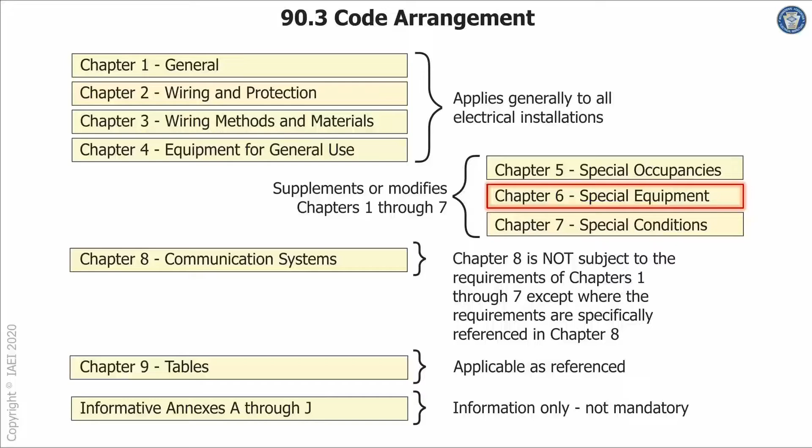So you've got to keep that in mind anytime you're dealing with a subject matter that is not located in those first 4 chapters of the NEC. If we were looking at photovoltaics today, we might see some rules in 690 that would supplement or modify some of those main rules that you would see in the first 4 chapters. And we are in Article 680 today. And Article 680 is one of the most unique articles in the entire National Electrical Code.

There are currently 8 parts to Article 680. For a long time, we only had 7 parts. The 8th part, electrically powered pool lifts, was added a couple of code cycles ago. But we have 8 parts here, and the beginning of each of those parts basically tells us that you have to stay in that part. In other words, if you're dealing with a permanently installed pool in Part 2, 680.20 will tell us that for that permanently installed pool, you have to comply with Parts 1 and 2 of Article 680.

You don't take a rule out of Part 5 or Part 6 and try to apply it to a permanently installed pool. And vice versa, you don't take a requirement out of Part 2 for a permanently installed pool and try to apply it to Part 3 for a storable pool. Again, that makes Article 680 a unique article in that, for lack of a better term, you basically have to have permission to go from one part to the next. You just can't take a rule out of Part 2 and try to apply it to Part 5 without something in Article 680 telling you to do so. So you've got to keep that in mind when you're studying Article 680 as well.

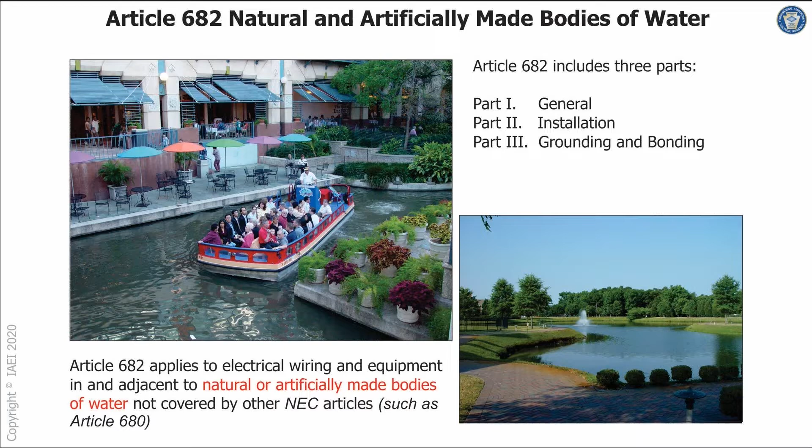Another thing that makes Article 680 unique is the definitions at 680.2. I don't know of another article in the entire code book that has more specific definitions that apply to Article 680. Now, typically, if you find a definition in Article 100, historically that means that definition can be applied all the way across the code. But when you find a definition at .2 of any particular article, in this case 680.2, that definition can only be applied to that particular article.

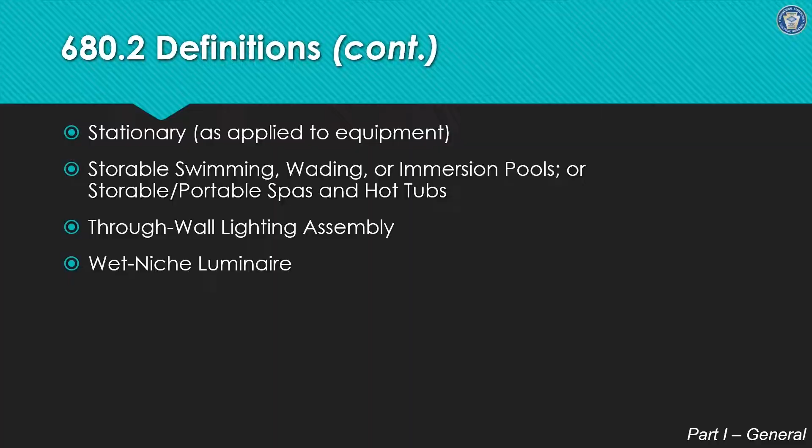And if the body of water that you're dealing with meets this definition right here, capable of holding water to a maximum level of 42 inches, intended to be stored when not in use, constructed on or above the ground with non-metallic molded polymeric walls, inflatable fabric walls, and so on, then you need to stay out of Part 2. You need to apply Part 3 to the particular body of water that you're looking at.

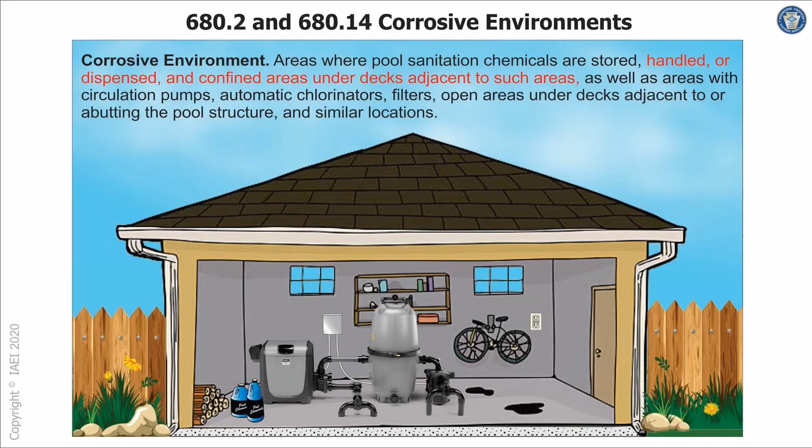We have 3 types of equipment that are defined in Article 680: fixed, portable, and stationary equipment. And a permanently installed pool, that's probably going to fall under the definition of fixed equipment, wouldn't you say? And something like a therapeutic tub would fall under the definition of portable equipment. Stationary equipment, that might be a storable pool, would fall under that type of definition.

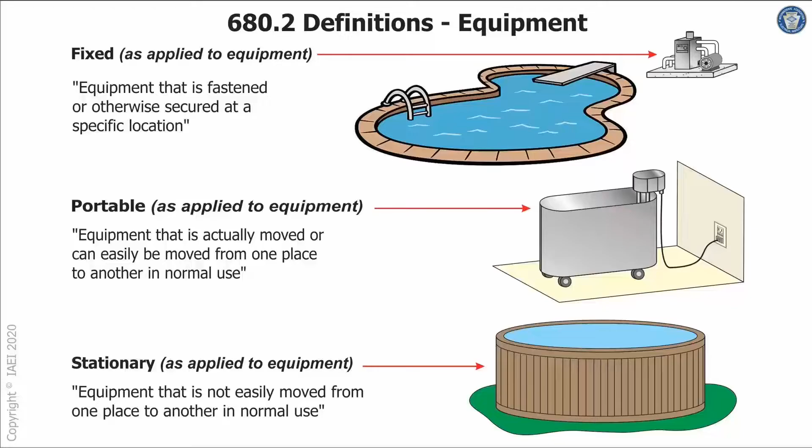New for the 2020 code here, we have a new definition. We had some language in the code dealing with an immersion pool prior to the 2020 code, but we didn't have a definition. And we have a new definition at 680.2 for an immersion pool, which is, of course, a pool for ceremony or ritual immersion of users, which is designed and intended to have its contents drained or discharged.

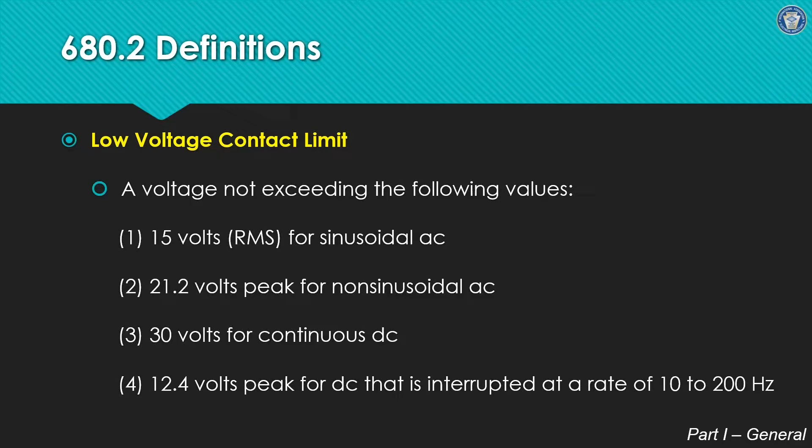And we'll see this term used quite a bit throughout Article 680. So if you hear me use that term, low voltage contact limit, and you don't know what we're discussing, then you can always fall back to that definition at 680.2. With the emergence of LED type lighting, that kind of threw a big spotlight, if you will, on the low voltage requirements in Article 680, and kind of led to that at that time new definition for low voltage contact limit.

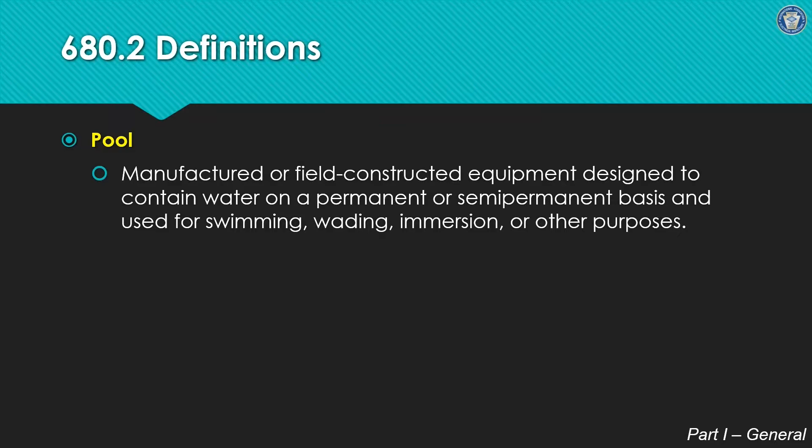Well, as soon as they crossed that threshold right there and made that storable pool to where it was capable of holding water greater than 42 inches, in some cases, they just took themselves right out of Part 3 of Article 680 and put themselves in Part 2 of Article 680, which was the last thing they wanted to happen to their equipment there. So that's kind of the dividing line between storable pools and permanently installed pools: how much water is it capable of holding?

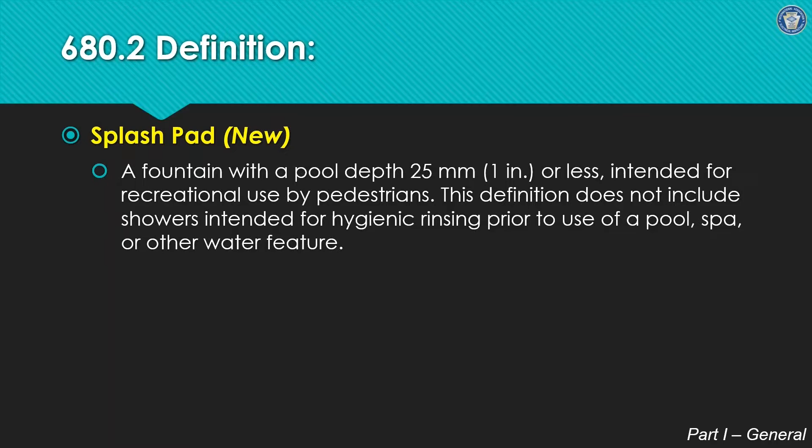Splash pads is a new definition that was added to the 2020 code. A fountain with a pool depth of 1 inch or less, intended for recreational use, does not include showers for hygienic rinsing prior to the use of a pool, and so on. Probably the most popular aquatic environment over the last decade or so has been a splash pad. And there's nothing new about these. These things started popping up, like I say, about a decade or so ago.

But we had no provisions for which part of Article 680 you applied to these things. And there's a new provision, I believe it's at 680.58, somewhere in there, in the 2020 code, that basically tells you that you have to apply Part 2 to these things. The same hazards that would be present at a permanently installed pool, as far as voltage gradients and things like that, would need to be addressed right here.

I took my 2-year-old granddaughter to a splash pad the other day, and it had a metal railing all the way around it, even coming up in the front here around the splash pad. And absolutely, don't you want to ensure that that metal railing is at the same voltage potential as the water or any of this equipment right here? And so you would need to establish an equipotential bonding grid at a splash pad, just like you would a permanently installed pool.

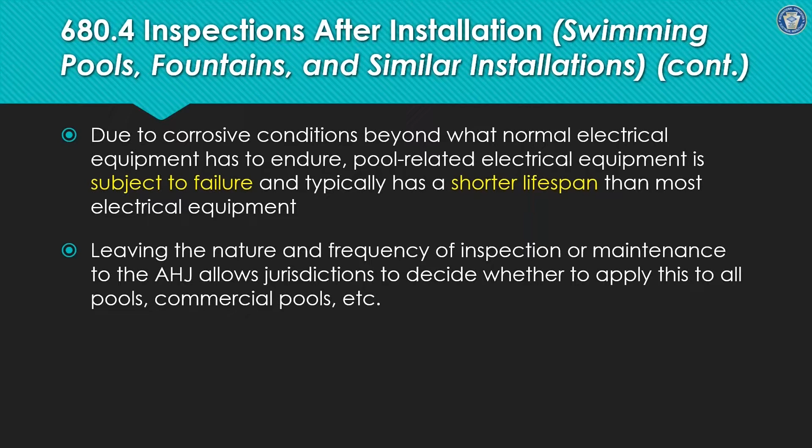So Code Making Panel 17 kind of took the first steps. I suspect that you're going to see this same type of a requirement perhaps in future code cycles for who knows what. Might even see something similar to this in 430 for motors or 440 for HVAC equipment or something. But this doesn't require the AHJ to go back and make inspections on existing installations, but it gives the AHJ permission to do such a thing.

When this was being proposed in the 2020 code, there were some AHJs, the inspection community, that said, wait a minute, I got more inspections than I can do in a day right now. And now you're wanting to add more to me. And again, this doesn't require an inspection. It just permits an inspection.

And some of the larger jurisdictions that I've talked to, once they adopt the 2020 code, perhaps they will use this to say, we're going to set up an inspection protocol to where we're going to make an inspection on existing pool equipment in commercial occupancies every 18 months. At least every 18 months, we're going to go to all the hotels, as an example, or health clubs, and make a visual inspection on some of this existing equipment.

I think it would be very difficult to try to apply this to residential settings because there's so many, particularly in a large jurisdiction. But I mean, I'm just giving an example here. Maybe that might be where a large jurisdiction would start in using this new requirement at 680.4 to institute a method of making an inspection on existing equipment.

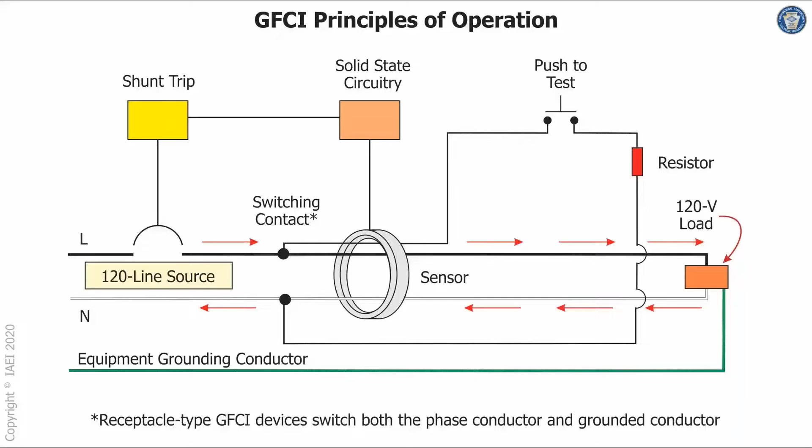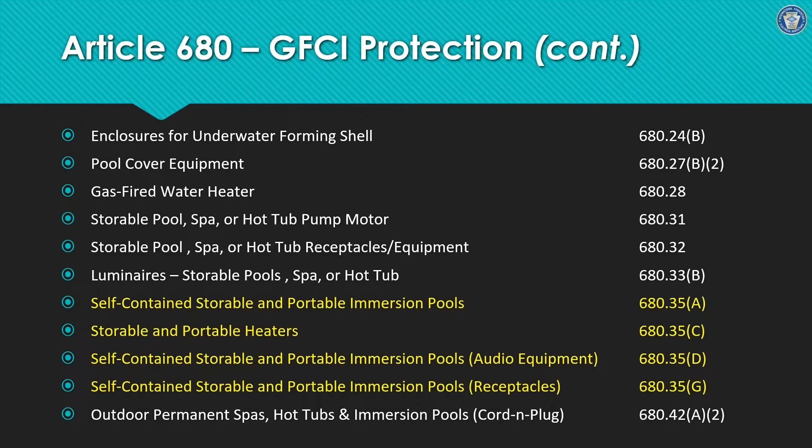Here's just some of the locations that GFCI protection is called for in Article 680. Now, this is going to take about 4 slides because there are so many requirements for GFCI protection in Article 680. Why? That unique triangle, people, water, and electricity that we're mixing, and we're doing it on purpose. I said for splash pads a while ago 680-58, I believe, but it's 680-50. So there's lots and lots of GFCI requirements in Article 680. We'll look at some of these individually as we move along here.

There is a unique requirement in 680 dealing with GFCI requirements. Conductors that supply pool equipment, such as a pool heater, and the lighting that goes directly into the pool, which has to be GFCI protected: those branch circuits cannot be installed in the same conduits or boxes or other enclosures that contain conductors that do not have GFCI protection. So like the pool heater doesn't require GFCI protection per se, so we couldn't put those conductors in the same conduit as the conductors going directly out into the pool.

And this requirement is in the code, I think, because we're trying to ensure that we don't ever accidentally send a circuit directly into the pool, like for that underwater light, that is not GFCI protected. And by the way, the GFCI requirement for an underwater pool light was the very first GFCI requirement in the entire National Electrical Code.

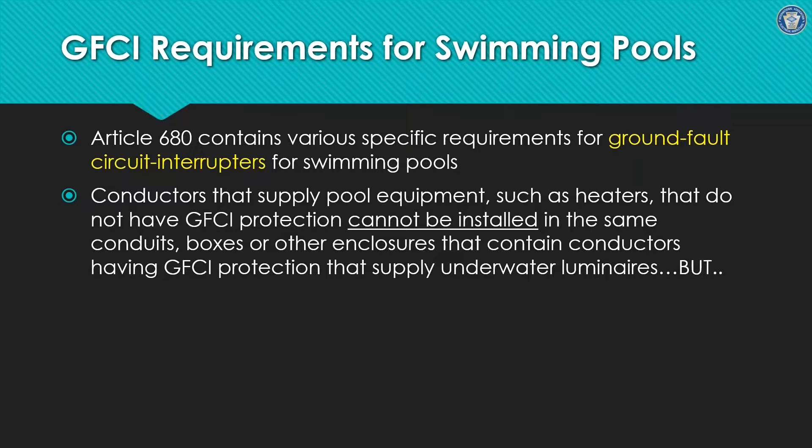Supply conductors that feed through to a GFCI device. In other words, you've got some GFCI protected conductors in the same conduit with some non-GFCI protected conductors, but those non-GFCI protected conductors are actually going to a GFCI device somewhere, at the next box or something like that. That's permitted.

Conductors on the load side of GFCIs are permitted to occupy the same raceways, and equipment grounding conductors are permitted to occupy the same raceway. Equipment grounding conductors by definition are not quote unquote GFCI protected conductors, but there are provisions here that would allow an equipment grounding conductor to occupy the same enclosure as your GFCI protected conductors.

So 680.23(F)(3) is where you find that requirement, and it's a very unique requirement in the code. I don't know of another place in the code that has language like this, talking about non-GFCI protected conductors and GFCI protected conductors, and being able to occupy the same raceways or enclosures or not.

And so you do have these 4 conditions here that are permitted. Again, equipment grounding conductors, yes, can go in the same raceways or boxes with GFCI protected conductors. These feed-through conductors that are going to a GFCI device can be installed in the same raceway as GFCI protected conductors, and so on.

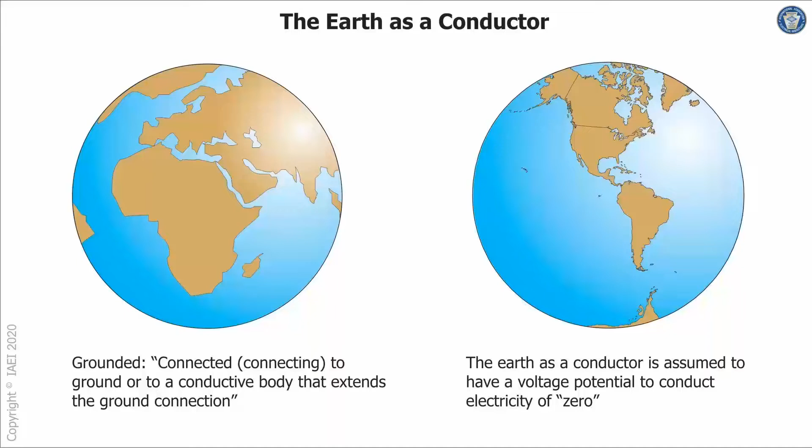Now, the earth is a conductor of electricity, but it's a poor conductor of electricity. That dissipation factor is our friend. That's why we connect equipment to it, because of that dissipation factor, allowing over voltages and things like that to dissipate out into the earth, again, because of the massive size of the earth.

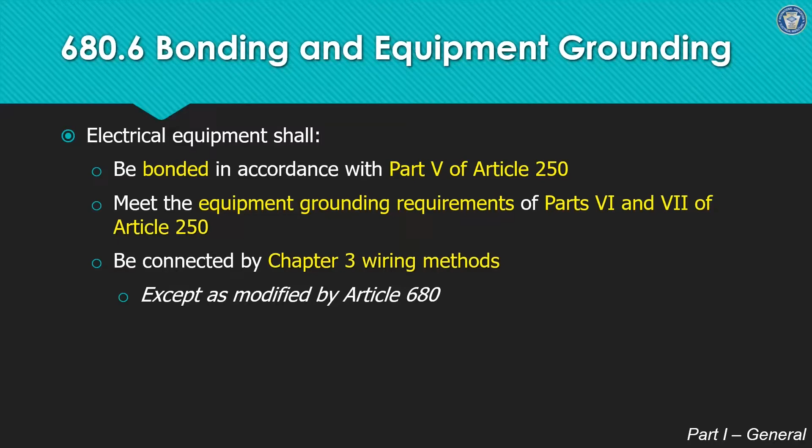So these 1, 2, 3, 4, 5, 6, 7 items right here are specifically spelled out at 680.6, that talks about this equipment has to be grounded and bonded. And again, for the most part, we're going to accomplish that with an equipment grounding conductor. So a through wall lighting assembly is specifically required to be grounded and bonded, connected with an equipment grounding conductor. Electrical equipment located within 5 feet of the inside wall of the pool is specifically required to be connected to an equipment grounding conductor.

And again, a good correlation between Code Making Panel 17 and Code Making Panel 5, in that 3 or 4 code cycles ago, these requirements right here said that it had to be grounded. Well, how do you accomplish that? So rather than say this equipment needs to be grounded, it now says it has to be connected to an equipment grounding conductor.

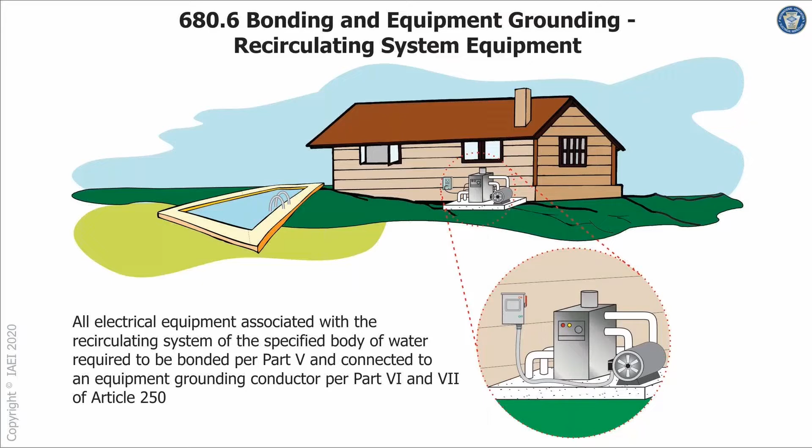Recirculating equipment, regardless of its location, it could be 65 feet from the pool, it's still required to be specifically connected to an equipment grounding conductor. Any transformers or junction boxes are required to be specifically connected to an equipment grounding conductor. GFCIs. Now again, a GFCI does not need an equipment grounding conductor to function properly, but for any GFCIs associated with Article 680, 680.6 tells us that the branch circuit has to include an equipment grounding conductor. And panelboards associated with pool equipment are required to be connected with an equipment grounding conductor as well.

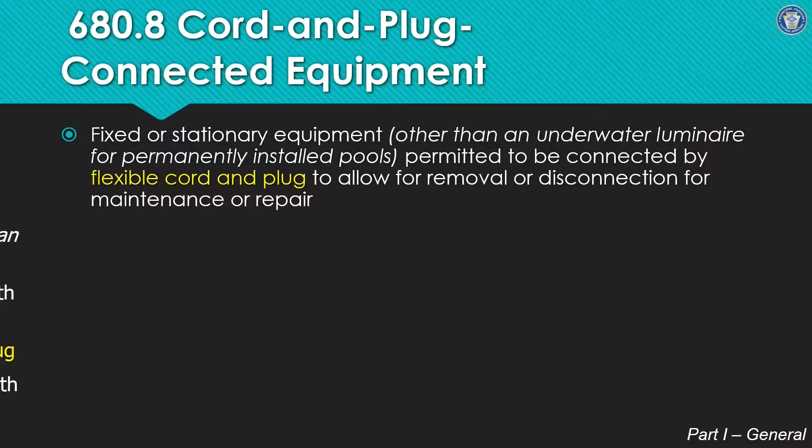680.8 talks about cord and plug connected type equipment, and fixed and stationary equipment. Now that excludes the underwater luminaire. Those are permitted to be connected by a flexible cord and plug to allow for removal or disconnection, maintenance and repair. Now, even that underwater luminaire is permitted to be connected with a flexible cord, but not a cord and plug connection. But some of your other equipment is permitted to be cord and plug connected.

Has to meet these four conditions here, not exceeding 3 feet in length. Now, for something for a storable pool, that cord can be up to, I think, 15 feet, that you'll see in part 3 if we get to there. But for the most part, you're limited to not exceeding 3 foot in length for your flexible cord for a cord and plug connection. Has to contain a copper equipment grounding conductor, sized per 250.122. Has to terminate in a grounding type attachment plug, and the equipment grounding conductor has to be connected to a fixed metal part of the assembly.

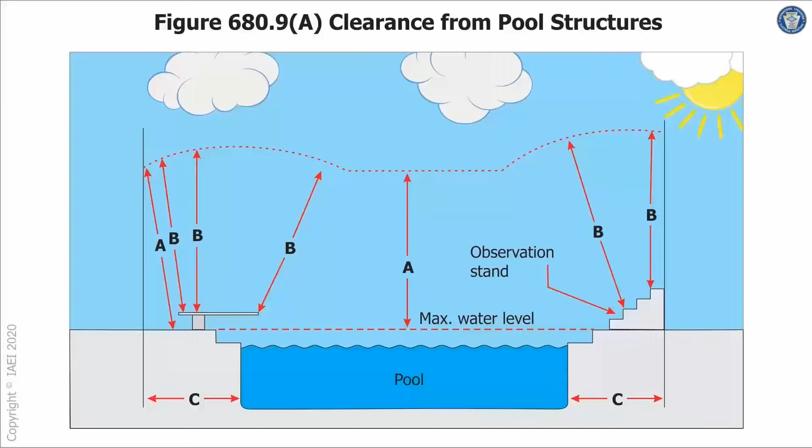So for power conductors, overhead conductors, for the most part, now there's different categories right here. If you're talking about a residential pool or a pool at a hotel or something like that, chances are pretty great you're going to be in that category right there: insulated supplies or service drops from 0 to 750 volts to ground. And that's where that 22.5 foot clearance comes from right there. It could be up to 25 or 27 feet with higher voltage overhead conductors.

So if it's a conductor from the power company, and of course that's not even covered by the National Electrical Code, that would be covered by the National Electrical Safety Code, and that NESC is also where these distances come from. All these distances here correspond to the overhead clearances that you would find in the NESC as well.

From diving boards and platforms and things like that, you're still looking at, again, probably those voltages right there, and you'd be looking at least a 14.5 foot clearance from a diving board or observation deck or something like that. This can get a little confusing because it also talks about a horizontal clearance, and that's where I got that 10 foot, where I said, if you're going to go over a pool, then you actually have to come 10 foot out from the pool and then up 22.5 feet. And it's because of this C here talking about this horizontal measurement from the inside wall of the pool.

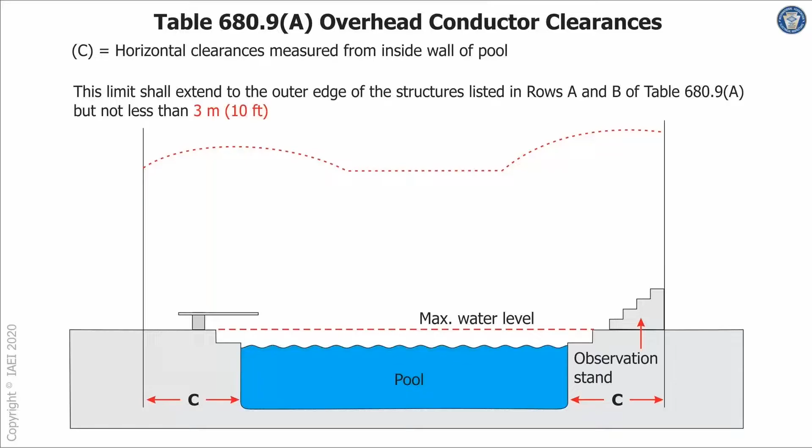So, well, I've got a slide coming up that we'll look at that'll talk about that a little bit more. And so the overhead power conductors, you're looking at a 22.5 foot clearance. And the best way I can describe this, it's kind of a hard concept to picture in your mind, but you can think of it like this. If you had a heart-shaped pool, you would have a heart-shaped 10-foot circumference around that heart-shaped pool that you would need to bring into play here, 22.5 feet tall.

If you had a rectangle pool right here, you've got this 22.5 foot, 10 foot out from the water's edge rectangle that any overhead conductors could not penetrate into that yellow area there. Now, again, this is a rectangle because the pool's a rectangle. If this were a kidney-shaped pool, this would be a kidney-shaped area here, 10 foot out from that kidney-shaped pool. But as long as you stay outside of this yellow shaded area right here, you're not in Article 680. You're in what? Article 230 for overhead service conductors, or 225 for branch circuits.

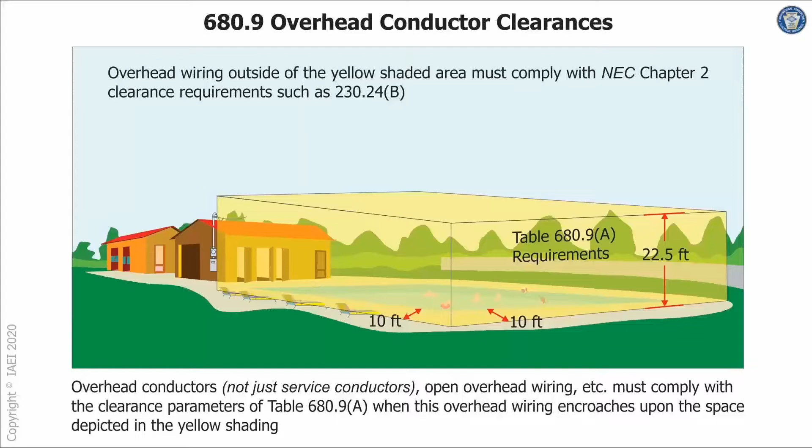Now, our communication conductors, telephone lines, things like that, those only have to clear the pool by 10 feet. Those have a signal running across it, but not voltage. And so you have a lesser overhead clearance for a communication conductor than you would a power conductor. Now, don't get that confused with a network-powered broadband cable, because those have not only a signal running across them, but current as well. And so you would treat an overhead network-powered broadband communication conductor just as you would a power conductor, and would have to comply with the 22.5 feet of clearance if you needed to go over that pool. Again, best thing to do is avoid the pool, in my opinion.

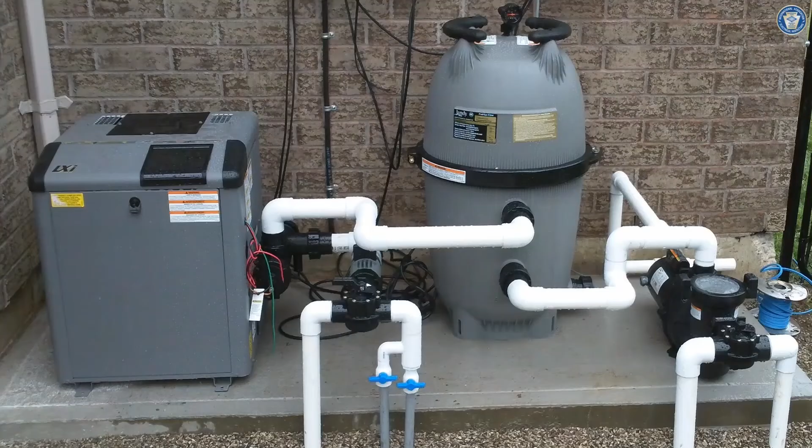Part 1 at 680.10 talks about electric pool heaters. A lot of them are gas fired. But if it is an electrically powered pool heater, it has to be subdivided so that you don't have loads exceeding 48 amperes, and has to be protected at not more than 60 amperes. Ampacity there cannot be less than 125% of the total nameplate load for either your branch circuit conductors or your overcurrent protection devices. So if you did have an electric pool heater, you're going to have to comply with those provisions at 680.10.

Here we get into our underground wiring methods around the pool. And this has gone through some pretty extensive changes over the last 3 code cycles. We used to have a table right here that gave us burial depth requirements when we were within 5 feet of the pool or under the pool. And for the 2017 code, I submitted the public input. I was trying to get an answer to a code question. I was sitting on a code panel at an IAEI section meeting, I believe it was.

And one of my questions was, if I'm within 5 feet of the pool, I know I have to comply. At that time, it was 680.10 for our underground burial depths. But what if I get outside of that 5 feet with the same branch circuit? Do I still have to comply with 680.10? And my answer was no. Once you got outside of that 5 feet, you were no longer in Article 680. You were in 300.5 at that point.

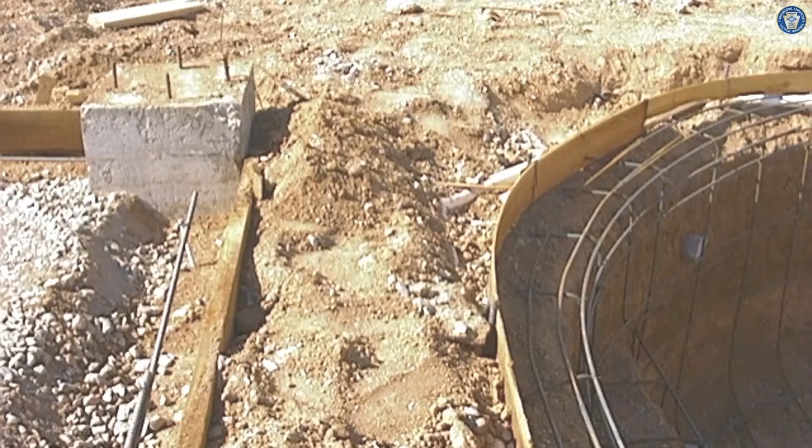If you have to come within 5 feet of the pool, like you see here, you've got another man's property over here. The property line is right there. There's going to be a fence right there, but right down here is probably a dwelling unit, and the electrical easement comes right here. The electrical underground service has to come right there, and you don't have your 5 feet.

You have to come within 5 feet of the pool with that underground service lateral or something. There are provisions in the code now that would allow this to happen, but you would have to install that in one of those wiring methods that we talked about: rigid metal conduit, intermediate metal conduit, and so on.

And a lot of people will look at that rule, and if you look at that language, it all actually talks about a complete wiring system. So if you had 100 feet of service lateral here from the transformer to the meter base, but only 15 feet of it actually comes within 5 feet of that pool, it would not be code compliant to just sleeve that 15 feet that comes within 5 feet of the pool.

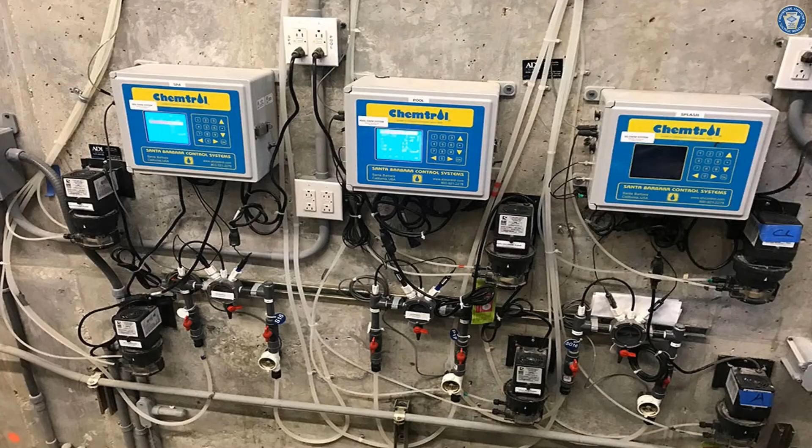Here you see some typical pool equipment in a pit or equipment room at, again, maybe a large hotel or something right here. Your maintenance disconnecting means. You've got to have a maintenance disconnecting means. It can be one or more. It doesn't have to be just one. It has to simultaneously disconnect all of the ungrounded conductors. It has to be installed in a readily accessible location.

Where are we going to find that definition? In Article 100. You need to be able to walk up to that piece of equipment without having to climb over another piece of equipment or something like that. It has to be within sight of the pool, fountain, or whatever we're dealing with there. It has to be located at least 5 feet horizontally from the inside wall of the pool, unless it is separated from the pool by some type of a permanently installed barrier, like a wooden fence or something.

But for the most part, your maintenance disconnecting means has to be at least 5 feet from the water's edge, and you take that measurement from the water's edge, the shortest path that a cord could take, and so on. The language that we have at 210.8 right now for GFCIs, where it talks about how you take a measurement for a GFCI device, shortest path the cord could take without piercing a floor, wall, ceiling, and so on, all that language in 210 was fashioned after this language right here at 680.13.

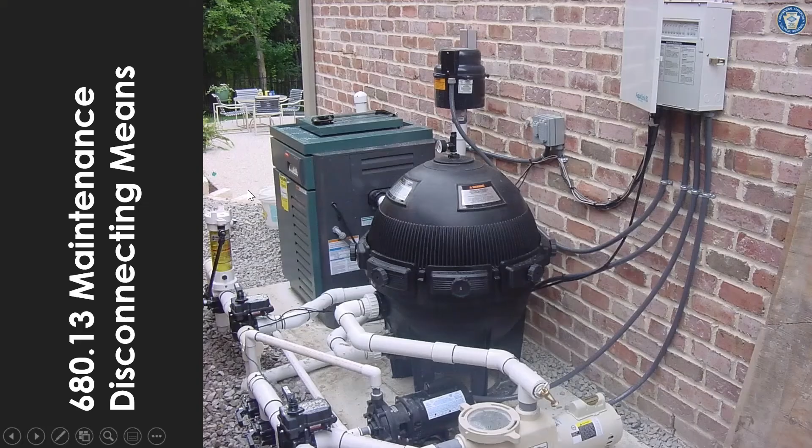Here's a typical maintenance disconnect, and look where it's located. Is that installed in a readily accessible location? I don't think so. I think you've got a working space violation right here. Working space, and that's not a readily accessible location. It's an accessible location, but not readily accessible.

680.14 is where it talks about our corrosive environments. And this is the section of the code that the authority having jurisdiction would use to determine if equipment located in a certain location is in a corrosive environment or not, using that definition that we saw at 680.2. And some of the language right here would allow the AHJ to make that determination as to whether or not it was a corrosive environment.

And just quite frankly, that would be a broad interpretation for an AHJ to say that your pool equipment is not located in a corrosive environment based on this code language right here and our definition that we see at 680.2.

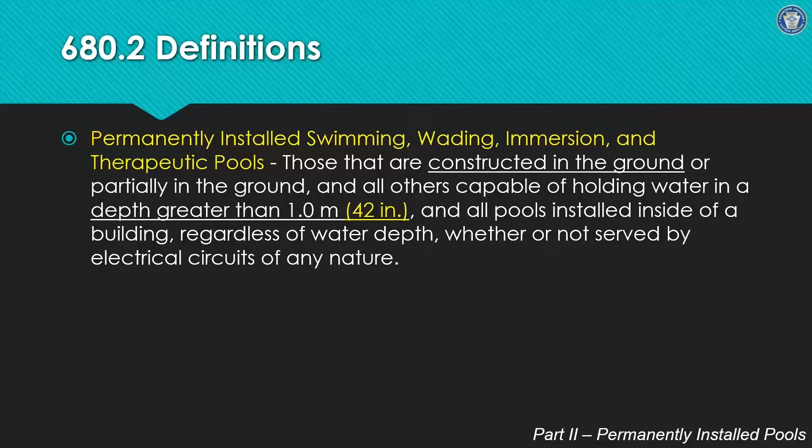And 680.20 tells us when it comes to a permanently installed pool that we have to comply with part one that we just got through looking at, all those provisions, and part two, the provisions we're getting ready to look at. Now, does 680.20 say comply with part one, part two, and part four? No. So for a permanently installed pool, we're going to apply two parts of Article 680, part one and part two.

If we're in a corrosive environment, the wiring methods for motors to a permanently installed pool are intermediate, rigid PVC, reinforced thermosetting resin conduit is permitted in those corrosive environments. MC cable that is listed for the location. Not all MC cable is listed for a corrosive environment. But there are certain types of MC cable that have the polymeric sheath on the outside of it. That is listed for a corrosive environment.

And all those wiring methods have to contain a copper equipment grounding conductor. Size, again, from Table 250.122, and in no case can that equipment grounding conductor be smaller than number 12 or 12 American wire gauge. If it's installed in a non-corrosive environment, once you get outside of the pool equipment room or the vicinity of where the pool equipment is located outdoors or something, and you're headed down the wall to a junction box or something, and you're outside of that corrosive environment.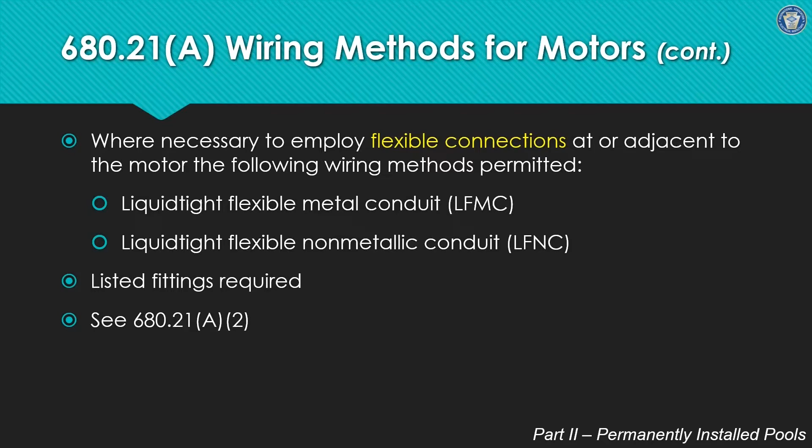If we have a double insulated pool pump motor, a listed cord and plug connection has to be incorporated into the motor itself. Again, providing grounding means for the internal non-accessible, non-current carrying metal parts of that motor is what that equipment grounding conductor would achieve there.

Where the equipotential bonding grid is connected to the equipment grounding conductor of the motor, which is a provision that we'll look at here in just a second. Then the bonding conductor to a replacement motor is an example of that. Again, we'll look at that here in just a second. The branch circuit wiring method has to comply with 680.21(A), which calls for an insulated copper equipment grounding conductor.

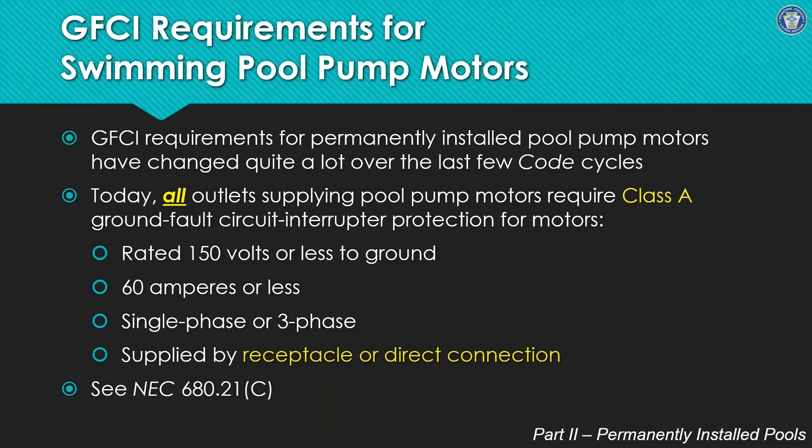All outlets, again, regardless of whether it's cord and plug connected or direct wired, call for GFCI protection if they meet these provisions right here, 60 amps or less, and so on. So all of these would call for GFCI protection, with the one exception if you had a listed low voltage motor that did not exceed those ratings in that definition for low voltage contact.

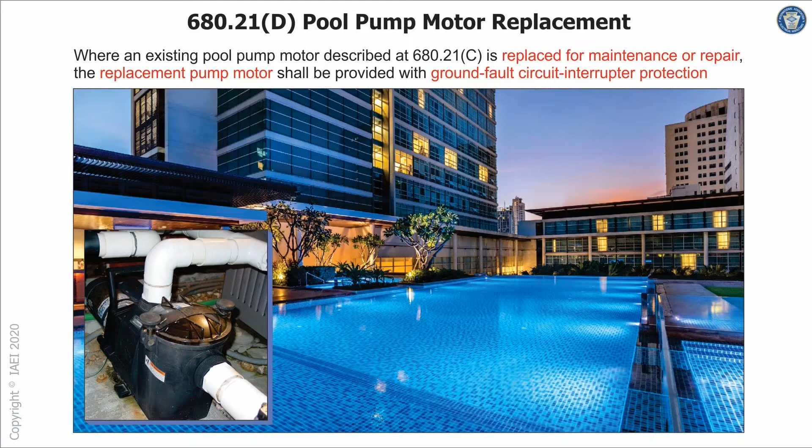There is a provision, new for the 2020 code, added here for replacement motors. If you had an older installation, you went to replace that motor and it was not GFCI protected, the new replacement motor would call for GFCI protection if it were 150 volts to ground or less, 60 amps or less, and so on. So even on an existing installation, if it were not already GFCI protected, it would call for GFCI protection. And again, that's a new requirement added to the 2020 NEC at 680.21(D).

Let's talk about receptacles in and around pools. This is a unique requirement for 680 that we don't see in other places in the code. We have a requirement here that calls for at least one 125 volt, 15 or 20 ampere general purpose receptacle to be located no closer than 6 feet from the water's edge, but no further than 20 feet from the water's edge.

Two code cycles ago, that rule only applied to residential pools. In the 2017 code, I believe it was, the residential part was removed so it applies to all pools now. So even a hotel pool, a commercial pool, new construction would call for a receptacle located no closer than 6 feet, no further than 20 feet from the inside wall of the pool. In order to comply with this requirement, it can't be located any higher than 6'6" above the platform or deck or whatever it might be.

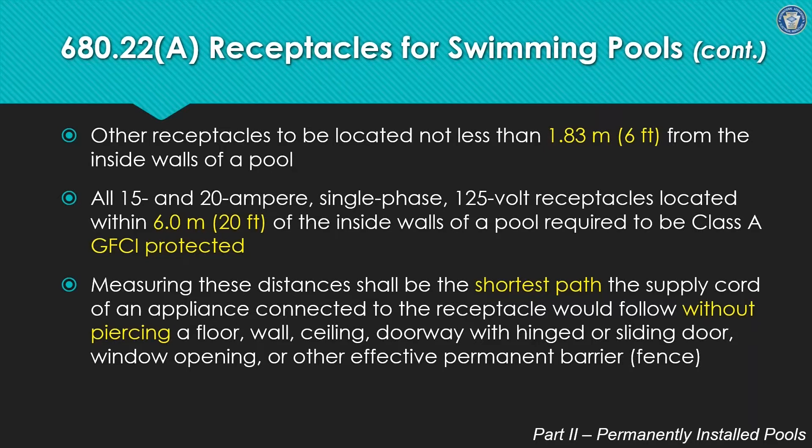And again, these measurements are taken along the shortest path that a supply cord could take without piercing a floor, wall, ceiling, doorway, and so on. That language you see today at 210.8 was crafted from this language right here at 680.22. So I have to have at least one receptacle located no closer than 6 feet, but no further than 20 feet from the pool.

I have a pool at my house, and my children are grown now, but when they were teenagers, I recall one time my son had some buddies over swimming, and they had gotten all the floats out. I have a receptacle located about 12 feet from the water's edge, and rather than put the floats up where they should have gone, my son left one leaning against the wall, and it covered up that convenience receptacle.

The very next day, my daughter came home from college and went out to sunbathe with her radio. This was years ago, before iPads or getting your music off your phone. She had a portable plug-in radio she wanted to listen to. I saw that float covering the receptacle and started to run out there, but I wanted to see what she would do. She looked around for a receptacle and didn't see one because it was covered up with that float.

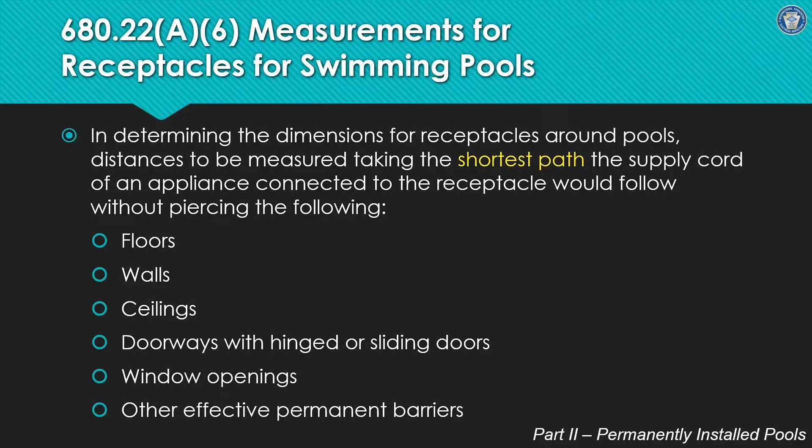Let's talk about lighting in these areas. Let's say we have a new outdoor installation. In other words, we got a new pool that we're installing outdoors. We're generally required to keep luminaires at least 5 feet horizontally from the inside wall of that pool, unless we can maintain at least a 12-foot distance above the pool with that new luminaire, and then it can go within 5 feet of the water's edge. But for the most part, you got to stay at least 5 feet from the inside wall of the pool.

Luminaires and lighting outlets that are installed within 5 to 10 feet. Let me see what I've got here. Yeah, let's look at this right here rather than read all that language. So for the most part, for an outdoor pool, if I cannot maintain 12 feet, let's say I put a new pool in, existing structure, and I've got a floodlight out here, and that PAR floodlight is 10 feet above the maximum water level here. That can't stay there. I have to go at least 12 feet in order for that to stay there above that water's edge.

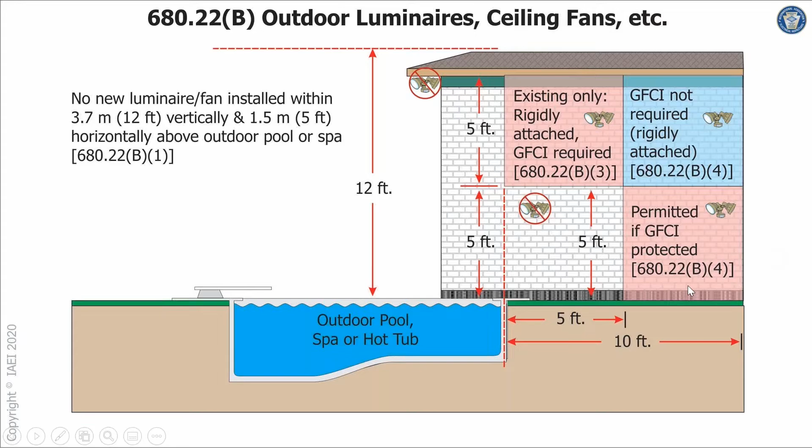Indoor installations, a little bit different here. You still have to maintain that 12-foot distance above the pool. But there are provisions where you could go as close as 7 foot 6 inches, if the ceiling fan, paddle fan, or luminaire was identified for such an application. In other words, identified for a wet location for the most part. Damp or wet location, the AHJ would have to determine whether or not that area right above the pool there is a damp or wet location.

And of course it has to be GFCI protected to get within that 12-foot clearance. And again, we're talking indoors. We're not talking outdoors right now. We're talking indoors. If we had an indoor pool, totally enclosed, and so on.

So the main rule still says indoors, get at least 12 feet from the maximum water level. But if you have a ceiling fan or a luminaire that is identified for such a location, then you can actually come as close as 7 foot 6 inches. You couldn't have anything on an indoor pool, spa, or hot tub within that 7 foot 6 inch zone there.

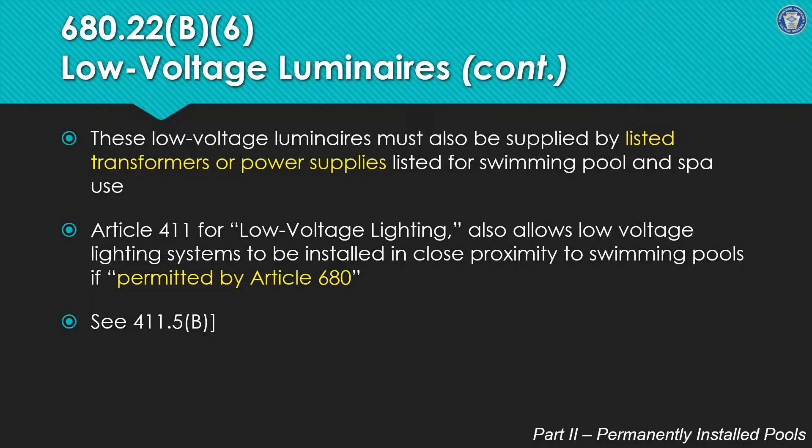It's very common to find that type of lighting, especially with the LED type lighting these days, closer than the restricted 5 foot areas that we saw a while ago, as long as this type of lighting system does not exceed those low voltage contact limits. And there are several manufacturers that make such low voltage lighting equipment that is permitted in an installation like this right here. LED low voltage type lighting.

The 17 code recognized listed low voltage gas fired units and igniters, low voltage igniters that can be located closer than 5 feet from the inside wall of the pool. Again, this type of equipment, whether it be a fireplace, fire pit, gas fired luminaires, those are very popular these days.

They have to fall into that low voltage contact limit definition, and they do not require grounding by connection to an equipment grounding conductor. Any type of metal equipment associated with these types of equipment would have to be bonded to the equipotential bonding grid because they're typically within 5 feet of the pool. Some of this equipment would be all plastic anyway, but if it did have some metal components and it's within 5 feet of the pool, it would have to be connected to the equipotential bonding grid. Why wouldn't you want it connected so that everything is at the same voltage potential?

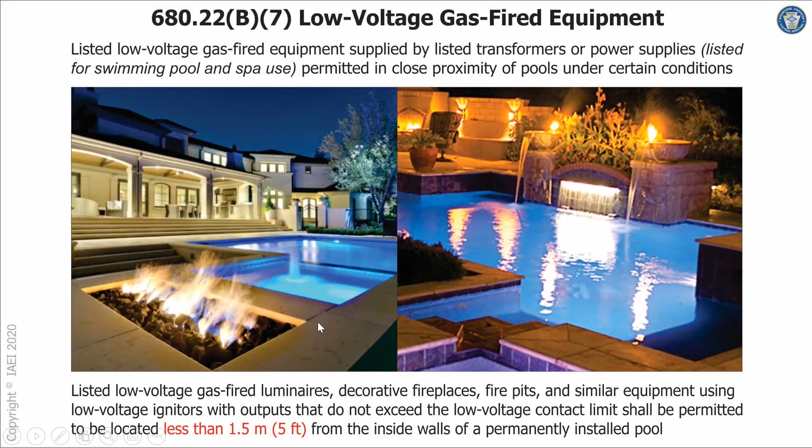Nice looking pool right there with those gas fired, I don't know what you'd call those, decorative units there. Again, you have that same provision here for your luminaires that we saw for receptacles: shortest path a cord could take without piercing floors, walls, ceilings, and so on.

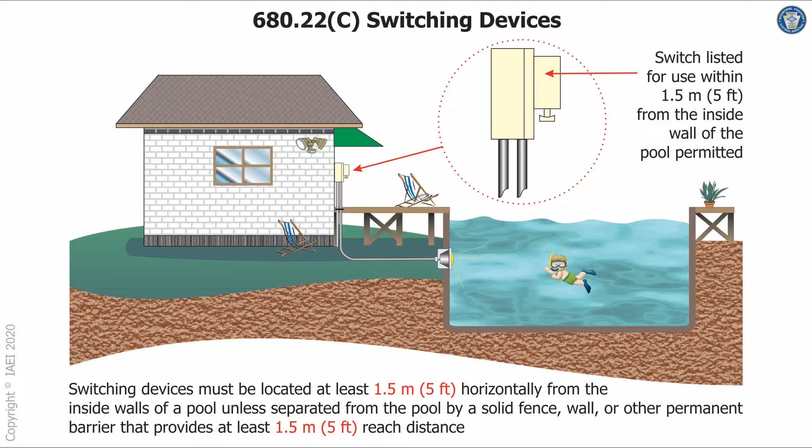Switches are required to be located at least 5 feet from the inside wall of the pool, again, unless they're separated by a permanent barrier like a fence or something. There are switches that are listed and identified to be used within 5 feet of a pool. Sometimes you'll see an air switch type thing. That's an example of a switch that is listed and identified to be used within 5 feet of the water's edge. But for the most part, a switching device is required to be at least 5 feet from the inside wall of the pool unless it is listed for closer distances.

Other type of outlets. What would an other outlet be? We talked about receptacles. We talked about luminaires. We talked about switches and all. What about communication outlets? Outlets for a phone or something like that. Those have to be located at least 10 feet from the inside wall of the pool. And again, that shortest path measurement thing would be utilized here as well. Fire alarm outlets, things like that, would have to be located at least 10 feet from the inside wall of the pool.

Any type of other equipment located in close proximity to the pool has to be located at least 5 feet horizontally from the inside wall of the pool. Now, this is new. This is a new requirement for the 2020 code cycle. And what would other type of equipment be? Well, we were starting to see pole-mounted PV arrays, things like that, that were located just right next to the pool. And so for the 2020 code, a limitation was put on such type of quote unquote other equipment, that equipment be located at least 5 feet from the inside wall of the pool unless it is separated by a permanent barrier such as a fence, wall, something like that.

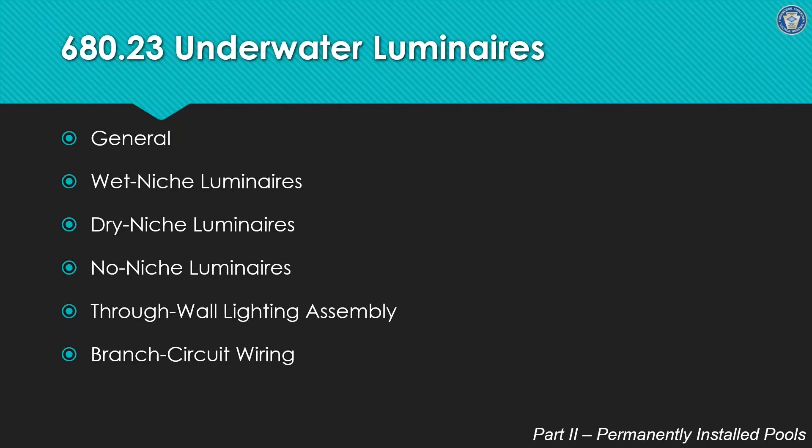Let's talk about the underwater luminaires, and then we'll get into 680.26 for equipotential bonding grids. 680.23 covers our underwater luminaires, underwater lighting, and talks specifically about wet niche luminaires, dry niche, no niche, and so on. 90% of the time, 95% of the time, the underwater luminaires that you see with your typical, especially a residential pool, are going to be a wet niche luminaire, but there's rules for the other types of underwater luminaires as well. They're at 680.23.

The underwater luminaire lighting has to be supplied either directly by a branch circuit or through a suitable listed isolated winding type transformer or power supply. And again, this is where I was talking about a while ago, where the transformer or power supply has to be listed, labeled, and identified for swimming pool and spa use. So isolated winding type, in other words, you would have a grounded metal barrier or double insulation system between your primary and secondary outputs. And if it does have a transformer power supply associated with a luminaire going directly into the pool, look for that label saying that it is identified as pool and spa.

Let's see. I thought that said that directly on there somewhere. Low voltage landscape, swimming pool, spa, accessory transformer, rain tight enclosure, and so on. If it goes directly into the pool there, either it has to be the low voltage contact limit or GFCI protection has to be installed in the branch circuit. There's locations in 680 where you can provide GFCI protection in the feeder to certain types of equipment, but for equipment or wiring method going directly into the pool, the GFCI protection is specifically required to be located at the branch circuit level right there.

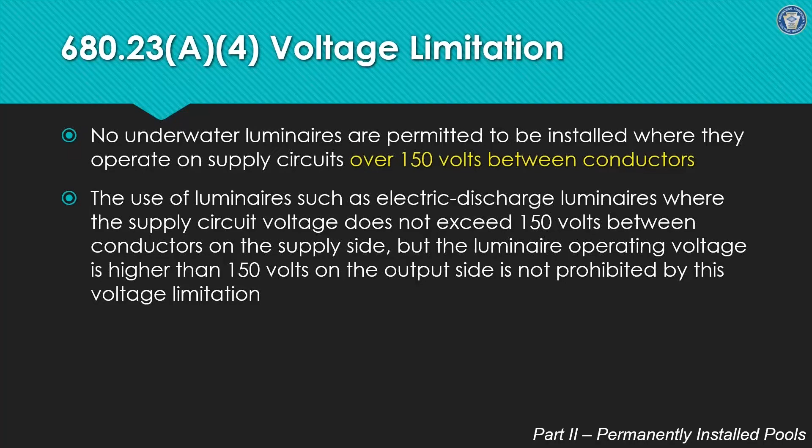No underwater luminaires are permitted to be installed where the supply circuits are over 150 volts between conductors. There are some provisions here. It's not an exception per se, but provisions for electric discharge lighting like fluorescent type lighting and so on that would exceed the 150 volts. But that would be only in that ballast type right there. But for the most part, you're limited to not over 150 volts between conductors for that equipment going directly into the pool.

150 volts between conductors for the supply circuits has to have the GFCI protection directly in the branch circuit, unless it's the low voltage type contact limit. The luminaire itself has to be located at least 18 inches below the normal water level.

Now, remember a while ago when we were talking about measuring those distances above for overhead clearances and things, we were talking about the maximum water level. This is a place where it talks about the normal water level, and I know my pool fluctuates, that normal water level, but you got to be at least 18 inches below the normal water level. They do make underwater luminaires that are permitted to go in lesser depths than that 18 inches, but in no case any less than 4 inches below the normal water level.

Think about it. If you were in a pool and you're hanging on to the side of the pool, if you put it at lesser depth than 18 inches, especially if you were hanging on to the pool right in front of that luminaire, you don't want that luminaire directly in front of your heart. You want it lower. I don't guess they're worried about other appendages, but that's why that rule's in the code, to keep the luminaire from typically being at heart level when someone was hanging on to the side of a pool.

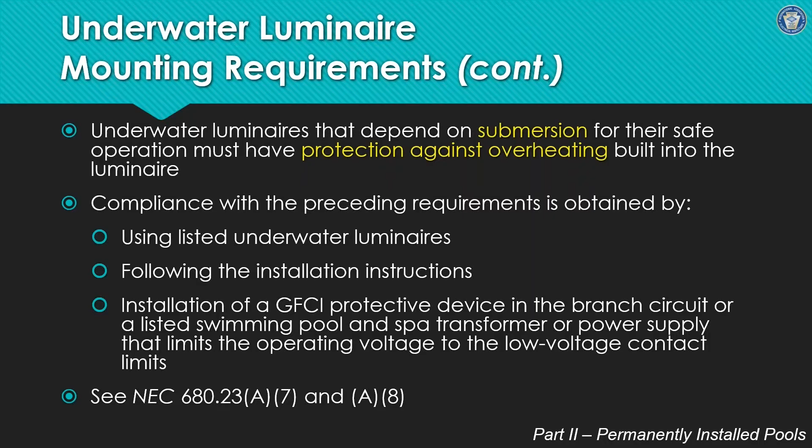They're typically dependent on submerging. In other words, you don't need to put power to them until they're surrounded with water. That keeps them from burning up, keeps them from overheating. So at least 18 inches below the normal water level unless they're listed for lesser depths, and in no case can they be less than 4 inches from the normal water level. At least 18 inches, so that again, if you were hanging on to the side of that pool, that luminaire wouldn't be directly in front of your heart.

The different types: the dry niche, no niche, and wet niche. And again, the ones you've seen, especially associated with a residential pool, would more than likely be classified as a wet niche luminaire, whose listing calls for them to be completely surrounded with water. Most common one, of course, is the wet niche luminaire.

Forming shells have to be equipped with provisions for conduit entries. Typically, they're brass or other approved corrosion resistant metal. Sometimes you'll even see a plastic non-metallic forming shell for a wet niche luminaire, but even with those, they'll have a lug with a metal strip from that lug to the front of that forming shell that can bond the metal luminaire itself, the ring that typically goes around the outside there once the luminaire is actually installed.

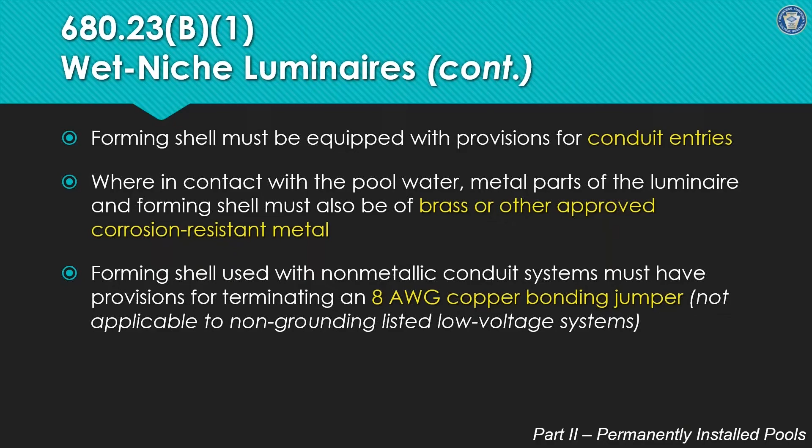If you choose the wiring method as PVC, non-metallic conduit system, then it has to have a number 8 copper bonding jumper installed with that non-metallic conduit. If it was a metallic conduit, then the metallic conduit can serve as the bonding means between the junction box and the forming shell and so on.

Your wiring methods for the wet niche luminaires: metal conduits listed and identified would either be rigid or intermediate, either red brass or stainless steel. Non-metallic PVC is permitted, but if you do use PVC or liquidtight flexible non-metallic conduit, that number 8 AWG solid or stranded copper bonding jumper would be required from the junction box to the forming shell, to serve as the bonding means between the junction box and the forming shell.

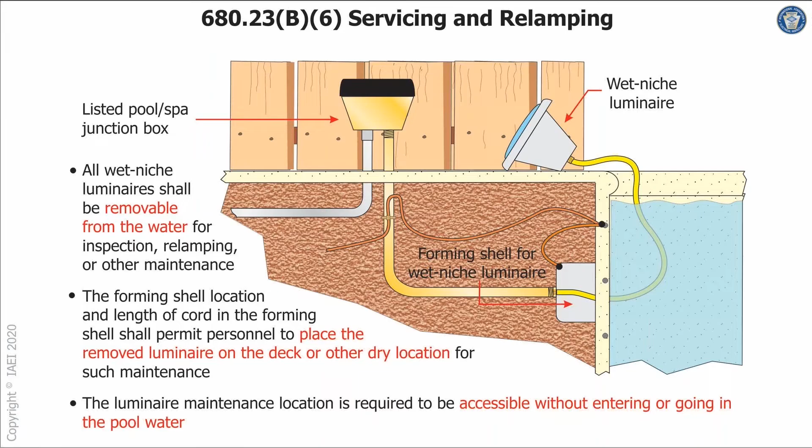Now you're gonna have to get in the pool to take out a couple of screws right there that hold this thing in place in the forming shell. But typically it'll have enough flexible cord to get it up to the deck or a dry surface to service that thing without having to be in the pool. Something like that right there.

There is a new provision in the 2020 code that talks about where you have a spa with a bench that you don't have to go all the way to the deck. If you have the ability to drain the spa, and if you can get it up to that bench, and that bench is a dry location with the water drained out of the spa, then that can satisfy this servicing requirement as well now.

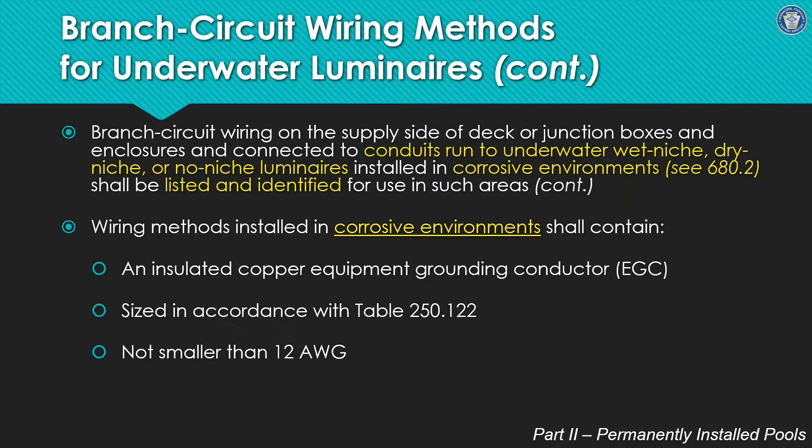On the supply side, in other words, over here, in a corrosive environment, you'd be limited to those wiring methods that we just looked at. If it's in a non-corrosive environment, then a Chapter 3 wiring method. And in a corrosive environment, you have that same provision for a copper insulated equipment grounding conductor, not smaller than number 12. Non-corrosive environment, your Chapter 3 wiring methods are permitted. Typical Chapter 3 wiring methods.

Liquidtight flexible metal conduit or liquidtight flexible nonmetallic conduit are permitted for a connection to transformers or power supplies. The total length there, you're limited to 10 feet, with any one length being limited to 6 feet. In other words, you might have 4 feet to the transformer and another 6 feet going out to a junction box or something like that. So you'd be limited to 10 feet total length, but 6 feet in any one length.

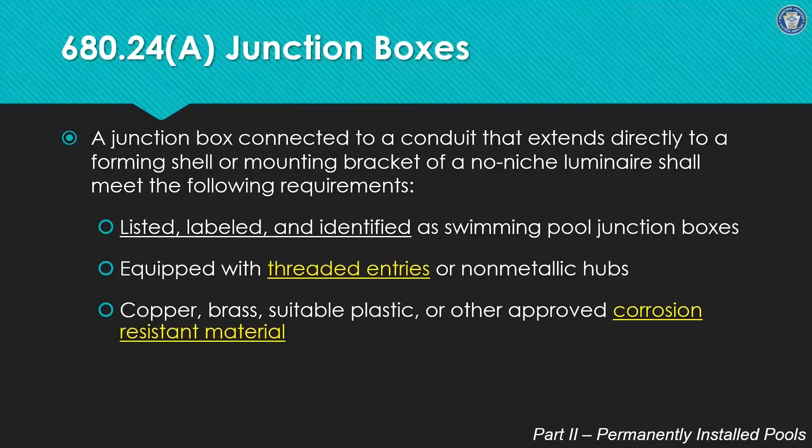That probably needs to say identified right there rather than approved. Who does approving? The authority having jurisdiction. If I were the AHJ, I would want to rely on a third-party testing agency for the corrosion-resistant material right there. But hey, that's what it says.

The junction boxes have to have electrical continuity between every connection. In other words, if you were using a plastic junction box, the manufacturer of that plastic junction box will typically provide you with some type of a metal strip that would have the proper size holes for the entries there that would provide that electrical continuity between the metal conduits connected to something like a plastic junction box.

You have to be careful about where you locate them on finished walkways and things like that, to where it's not a tripping hazard. And you have to have no fewer than one more grounding terminal than the number of conduit entries. Of course, that's a manufacturer's provision, but if that manufacturer provides 4 conduit entries into that listed swimming pool junction box, then they'd also have to provide at least 5 grounding terminations for bonding jumpers, equipment grounding conductors, and so on to be terminated within that listed junction box.

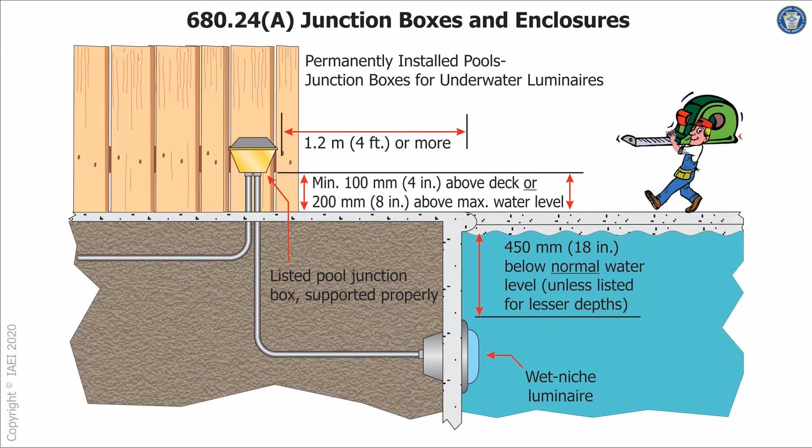Now, if I had some type of split level pool, then yeah, now I only have to be 4 inches above this deck because that's not the maximum water level. That would be the maximum water level down here.

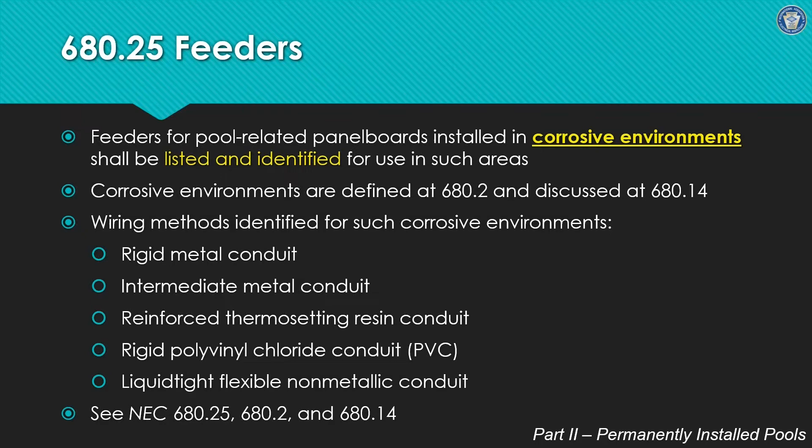680.25 talks about feeders to pool related panel boards. If they're installed in a corrosive environment, then again, there's your wiring methods right there: rigid metal conduit, intermediate metal conduit, and so on. In a corrosive environment, that feeder is going to have to include an insulated copper equipment grounding conductor, not smaller than number 12. Aluminum conduit is not permitted in a pool area where it is subject to corrosion. So in a corrosive environment, that feeder for this panel board associated with pool equipment would have to contain an insulated copper equipment grounding conductor.

If I'm in a non-corrosive environment, then again, a Chapter 3 wiring method would be permitted. Any Chapter 3 wiring method that is identified for whatever application we're getting ready to put that feeder through. Chapter 3 wiring methods there for non-corrosive environments.

All right, let's talk about our equipotential bonding grid. We did a whole webinar on this a month or so ago, and we'll probably spend the remainder of our time talking about it here. This used to be called a common bonding grid. I'm going to say 2008 code, somewhere in there, maybe 2005, I can't remember. The term was changed from common bonding grid to equipotential bonding grid to help illustrate exactly what this is for. And it's for what? Equal voltage potential, to equal out the potential for voltage on any type of metal equipment associated with this pool, any fixed metal parts within 5 feet of the pool, and so on, required to be connected to this equipotential bonding grid.

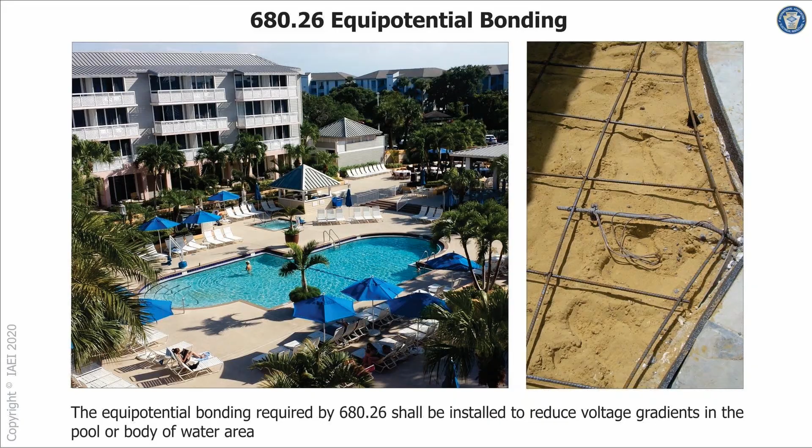Same voltage potential. That's what we're trying to get at right here. We're not talking about a fault return path necessarily here. We're talking about a bonding path to bond components together.

I've been out to job sites before around the pool, and we'll talk about this a little more, but the electrician, the installer would take one continuous length of number 8 copper, and there's nowhere in Article 680 that calls for that to be in one continuous length. But they'll take one continuous length and run it all the way around the pool and hit the deck steel and the diving board and the pool ladder and run 50, 60 feet over to the circulating pump and so on.

And he'll use about 200 feet of that copper, and he's bonded everything, and then he's standing there with the end of that copper in his hand, and he doesn't know what to do with it. And what he should do with it is just drop it and get away from it. But yet, I've seen installers drive a ground rod right there and connect it to a ground rod. What are you doing? I mean, how much more grounded can we get than that pool structure?

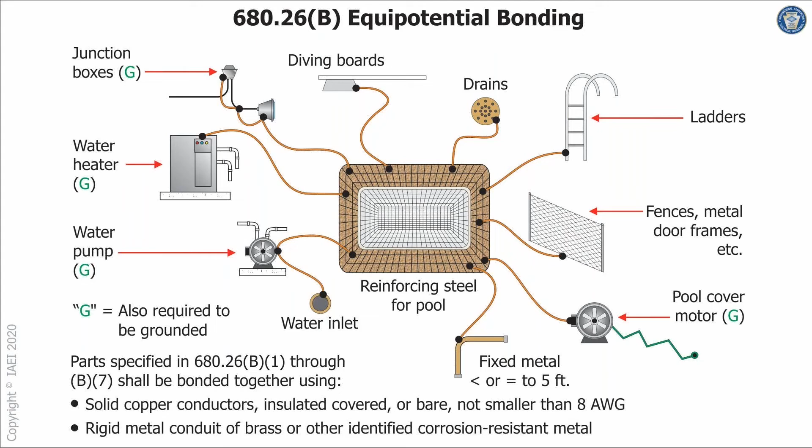Now, attach your metal components to it and get away from it. 5 feet and hit the ladder. Another 5 feet and hit this metal fence that's within 5 feet of the pool. 45 feet over here to where the circulating pump is located. Nowhere in the code does it talk about having to do that right there. Does that meet code? Yes, but it's not required to be installed in one continuous length without a splice. You simply have to accomplish bonding of all of these metal components that are spelled out at 680.26(B). And we'll take a look at some of those individually here in just a second.

Now that fitting right there that I use, that clamp right there, is going to have to be identified for what? Going to have to be identified for concrete encasement, direct burial, and that's actually what that little label right there is telling us, is that this fitting is listed for concrete encasement or direct burial. So use a fitting listed for the application.

That clamp right there is also going to have to be identified for what? Use with rebar. You can't just take a pipe clamp, take the bottom part loose and turn it over. It makes a pretty snug fit right there, but that's not identified for that type of application. And they do make a clamp that is identified for rebar, and I think we've got some pictures of it coming up.

Oh my gosh, look at that. Oh Lord, everybody, let's run, jump out the window. A splice. Oh my gosh. That's not installed in one continuous length without a splice. Great. As long as I use a fitting that is listed for that application right there, that's perfectly acceptable right there. There's that same shot right there.

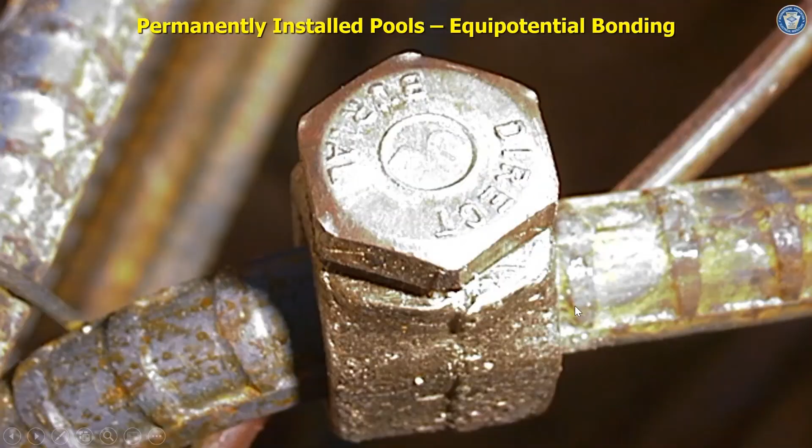I don't think so. Here's a clamp that is identified for direct burial and concrete encasement. It's also a clamp identified for use with rebar. The clamp, you're going to find a lot of information on the clamp itself. This one's telling us that it's identified for direct burial.

For the most part, when you make a connection like this, it's required to be accessible. But there's an exception to that rule that says, for direct burial, it's not required to be accessible. This particular installer right here installed this can-looking thing right here everywhere where he made a connection like this. Again, is there anything wrong with that? No, not required by code, but an exception would say that's not required to be accessible if it's a clamp listed for direct burial and it's going to be a direct buried connection.

So when we get to 680.26, Part A is our performance. That's where it tells us what the equipotential bonding grid is for: equal voltage potential between metal parts and all. And then 680.26(B) gets into our bonded parts. And about the 2011 code, I believe it was, somewhere in there,

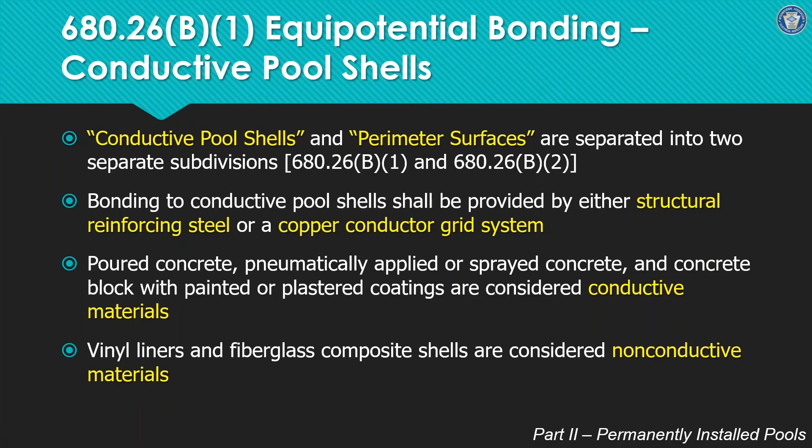So there's my conductive pool shell, my belly steel, and I have different rules for that perimeter surface, the deck steel. And again, Panel 17 has done a nice job of breaking those two components apart at 680.26(B). So let's look at where we have structural reinforcing steel. If it's unencapsulated structural reinforcing steel, it's required to be bonded. And again, for the most part, that non-encapsulated structural reinforcing steel can serve as our equipotential bonding grid. We just need to tie stuff to it.

Your normal tie wires that the concrete man's going to install can serve as a bonding means between that structural reinforcing steel. And a lot of times people will kind of get caught up with, oh my gosh, you've got unqualified people, and don't worry about crap like that. I mean, IEEE has done studies years ago that showed that once you get concrete around that structural steel, it's just as conductive whether those tie wires are there or not. The tie wires are simply there to hold that structural steel in place until I can get some concrete around it. That's it.

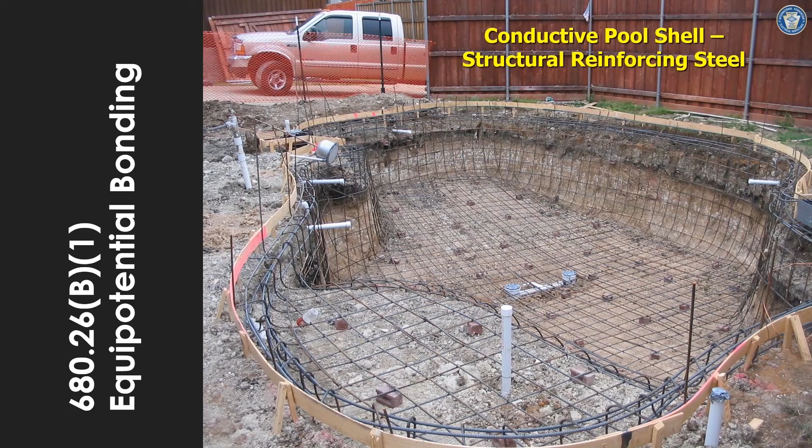In a lot of places in the country, I know they do that here in Texas, but I've seen it in several places around the country, they'll put the steel in for the belly steel right here, but they'll also leave 4 or 5 feet of rebar sticking up right here. They'll go ahead and pour this once it's inspected and all, but they'll leave these pieces sticking up out of the deck to where they can fold those over into the deck steel to bond the belly steel to the deck steel.

There's some reinforcing steel that is encapsulated. I don't know if any of you have ever run across that. I have never seen this installed at a pool environment other than on the coast area in Florida. I did see some of this installed down there in that area, a very, very corrosive environment there by the ocean. I have seen that installed in those locations, but other than that, I've never seen the encapsulated reinforcing steel.

But if you do encounter this, this is considered non-conductive. That's a plastic coating around that rebar right there that makes it considered non-conductive. And so if you had this encapsulated non-conductive rebar, then you couldn't rely on it as part of your equipotential bonding grid. You'd have to install the copper grid system or something at that point.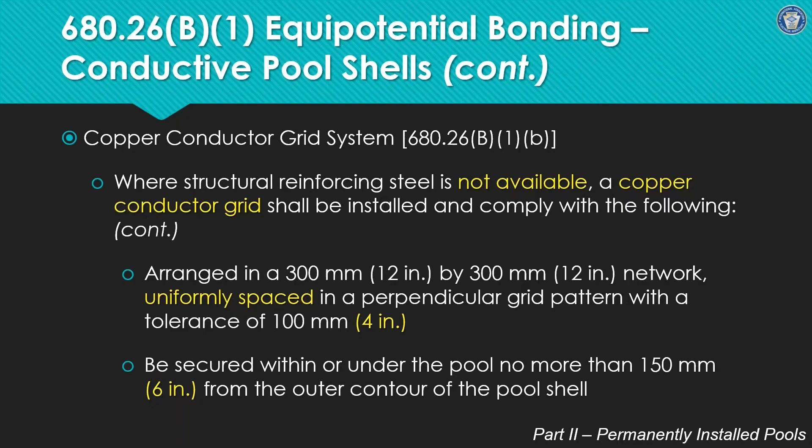Now, again, guys, we're talking pool shell right now. We're not talking deck steel. There's different rules for the deck steel that we'll talk about in slides coming up. So if I encounter a pool with encapsulated rebar, or we don't have any rebar at all, then for the belly steel, my alternative option is that copper conductor grid system with these provisions. And you're looking at quite a bit of labor, I would suspect, involved with that copper conductor grid system for your belly steel.

I've had people tell me that if they were to encounter something like this, even though it's not necessary for the structural integrity of that pool, they might go to your big box stores and buy some welded wire mesh and install it in the belly structure, simply to serve as structural steel to get around, I guess, this copper conductor grid.

I think you could install that welded wire mesh, even though it's not required structurally. I think that might be an easier, less expensive alternative than your copper conductor grid system, because the code says where I don't have structural reinforcing steel available, then I have to use that copper conductor grid system. Well, if you installed welded wire mesh there, then you would have structural reinforcing steel. So I didn't say that. If anybody from NFPA is listening, I didn't say that, okay?

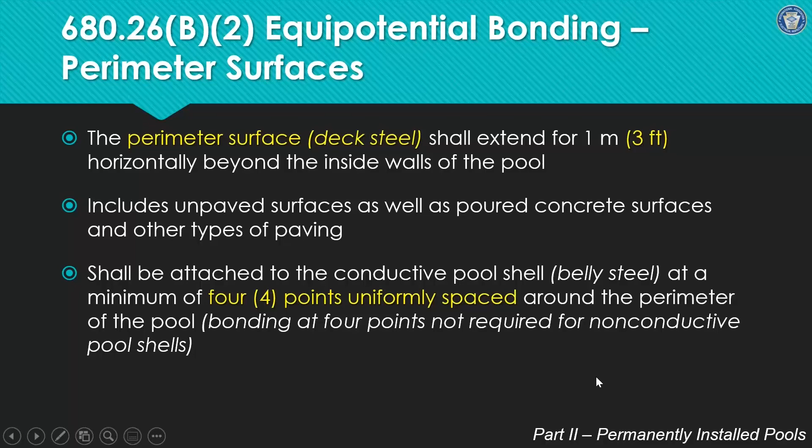The perimeter surface is going to include all of those areas, 3 feet from the pool, unless again it's separated by a permanent wall or barrier. That wall or barrier would have to be at least 5 feet in height in this requirement. And on the other side of that 5 foot permanent barrier, the equal potential bonding grid would not be required.

Now, if you don't have structural steel, then there are 2 alternative methods here in the 20 code. In the 17 code, you only had 1 method, but the 20 code gives you 2 options right here if you don't have structural reinforcing steel. So, your deck steel and your belly steel would have to be connected at at least 4 uniformly spaced points. If you had a permanent wall here, then your equal potential bonding grid would not be required over here, but it would be required right here. And it would be required for that structural component right there.

Again, your structural reinforcing steel for your deck steel or perimeter surface could include welded wire mesh. It could certainly include rebar if that rebar is not encapsulated. If it's not available, then at that point your option is copper conductors, a system of copper conductors, which they call now in the 20 code a copper ring, and that was your only alternative in the 17 code. For the 20 code, that same copper grid system that we saw for the belly steel can also be employed for the perimeter surface deck steel as well. That was again added for the 20 code.

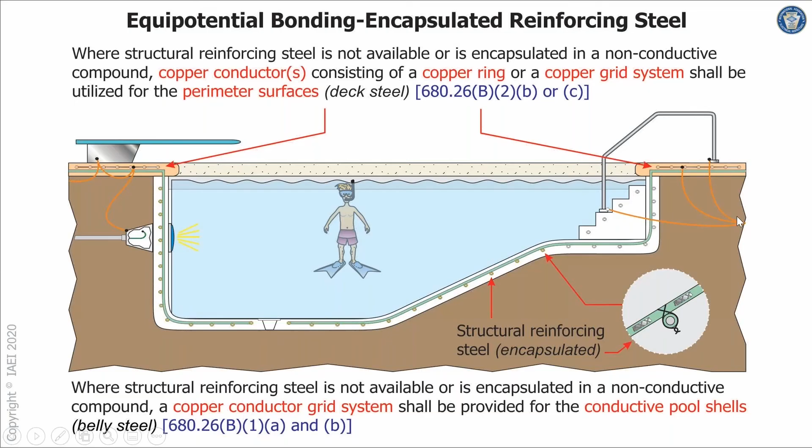So either the structural reinforcing steel, or if you don't have structural reinforcing steel, or the reinforcing steel is encapsulated, then a copper ring system or a copper grid system would have to be employed for the perimeter surfaces. We've already covered the belly steel. We're talking now about the deck steel or perimeter surface right here. What are you looking at right there, folks? You're looking at your equal potential bonding grid. Now, attach things to that need to be bonded, your ladders and circulating pumps and so on, and you're done. You can see that right there.

That's part of the rebar, part of the belly steel that was stuck up out of the belly steel right here, where they could just bend that over, there's another piece, there's another one, and uniformly attach the deck steel to the belly steel right there. Some people would look at that and say, boy, what a nice deck that's going to be once that gets finished. What I see right there is an equal potential bonding grid. And now I just need to attach things to it. I don't know why people have so much issues with associating this right here as the equal potential bonding grid, but that's what it is.

Now, if I don't have this, it's either a cool deck system, or with the fiberglass components or whatever, or this steel is encapsulated or something like that, then here's my alternatives right here. If that structural reinforcing steel is not available, I could employ at least one number 8 bare solid copper conductor. Can I have more than one? Yes. That follows the contour of the perimeter surface, in other words, the deck. If I do splice it, then yes, I have to use a listed splicing device or exothermically welded process, because it's going to be encased in concrete more than likely.

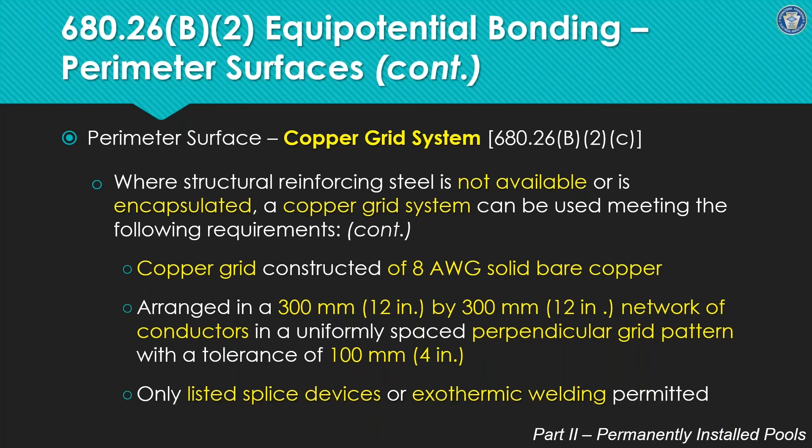The copper grid again has to consist of number 8 solid copper conductor arranged in that 12 by 12 network pattern, just like we saw with the belly steel. Has to follow the contour of the deck, the perimeter surface, has to extend at least 3 feet horizontally from the inside wall of the pool and secured within 4 to 6 inches below subgrade again.

So if I didn't have any reinforcing steel right here, I could employ my copper grid system for the deck right here, as well as for the belly steel if I had to do that. But I can also employ that copper ring for this area over here that's not going to be unpaved if I choose to do that. You got some choices here.

Now, all metal components of the pool, and that would be your structural reinforcing steel, things like that, are required to be part of your equal potential bonding grid. And again, the tie wires are a suitable means of connecting structural steel together, or bonding if you choose to say that.

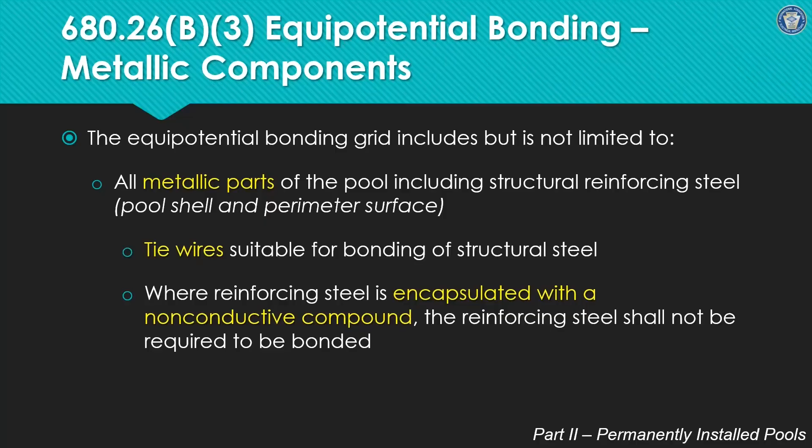If the reinforcing steel is encapsulated, the reinforcing steel can't serve as the bonding method. It's not conductive. So metal components that are conductive have to be incorporated into our equal potential bonding grid. If it's a non-conductive structural component, rebar, then it can't serve in the equal potential bonding grid because again, it's not conductive.

There's the deck steel. This is part of the belly steel coming up, and you see it connected with the normal tie wires. We're using a clamp listed for the application there. Hopefully that's a rebar clamp. It actually looks like a pipe clamp that electrician has jury rigged there. Your normal tie wires can serve as an acceptable means of bonding pieces of rebar together.

Your underwater lighting, that forming shell, needs to be part of or connected to the equal potential bonding grid, again, unless it is a low voltage lighting system with non-metallic forming shells. So that right there is required to be connected to the equal potential bonding grid. So again, everything's at the same voltage potential. Marry that piece of equipment to the metal ladder and the reinforcing steel and so on. You want it connected together, so it's at the same voltage potential.

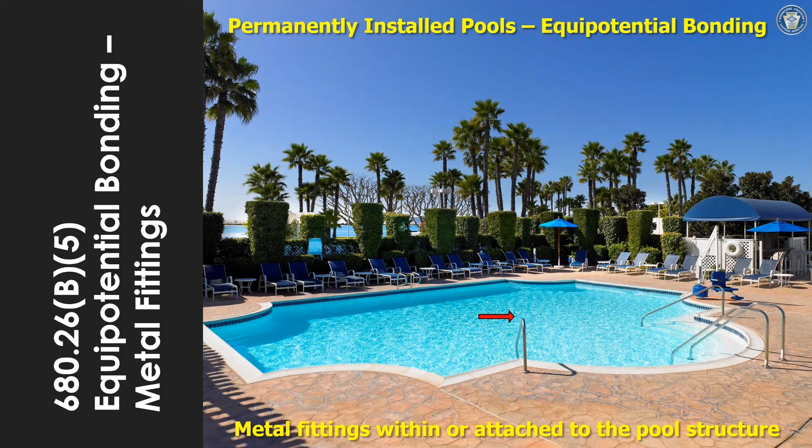Fixed metal fittings, like these right here, are all required to be connected to the equipotential bonding grid. Same voltage potential is what we're trying to achieve. Metal anchors for pool covers were added, I believe, in the 2020 code, to some of those small conductive parts that were not required to be bonded because how likely are those to become energized.

Your electrical equipment, regardless of its location: most of the equipment we just looked at was required to be bonded primarily because it was within 5 feet of the pool. But equipment that circulates water and is associated with the pool itself, like a pool heater, pool pumps, and so on, is required to be connected to the equipotential bonding grid regardless of location. It may be 65 feet from the water's edge, but it's still required to be connected. Every drop of water in that pool is going to come through that equipment.

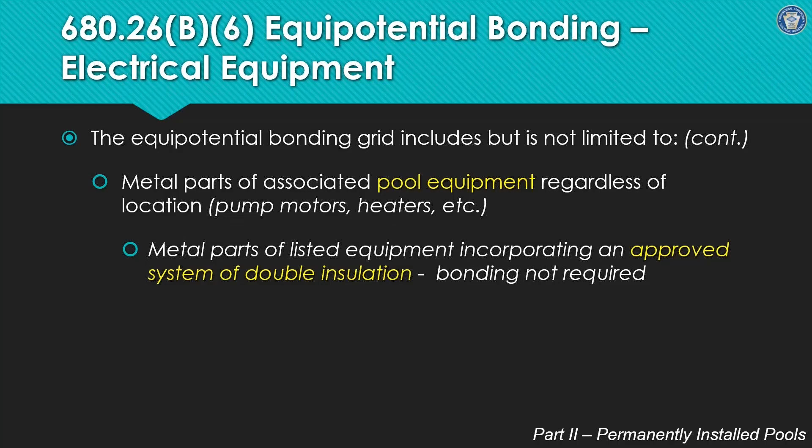A pool pump that is of the double insulated type is not required to be bonded, and we'll see some of that here. Some of this equipment is required to be both grounded and bonded. I achieve grounding of this motor by connection to an equipment grounding conductor, but I also have to connect it to my equipotential bonding grid with that bonding jumper to put all of the non-current carrying metal parts of these components at the same voltage potential.

And again, the manufacturer provides us with some of these terminations to help us achieve this equipotential bonding. Pool pump motors will have that external lug. I've seen these external lugs even on a completely plastic housing, or a double insulated pool pump motor. I asked a manufacturer of this type of equipment one time why they put that lug on there, even on a plastic housing, and he said labor. It was just cheaper to put a lug on every one of them than to determine which ones needed it and which ones didn't.

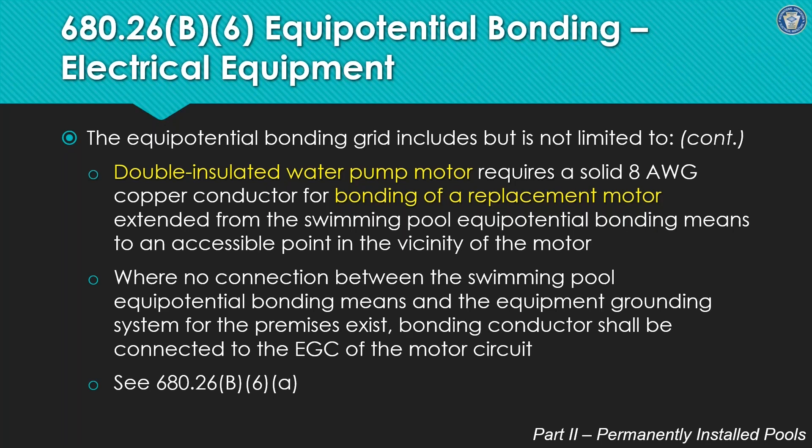This is that requirement for the double insulated pool pump motor. If you have a double insulated pool pump motor, you still have to have a bonding jumper from the equipotential bonding grid in that vicinity, in the event that it might be replaced in the future with a non-double insulated pool pump motor. Five years from now, it may be replaced, and in that case it would need to be connected to the equipotential bonding grid. So the code calls for this bonding jumper or bonding conductor to be in this vicinity.

It has to be connected to the equipment grounding conductor of the pool pump motor if there's no prior connection, which it probably won't be. All fixed metal parts, like a metal railing or a metal fence or something, metal casing of a window, if that window is within 5 feet, it is required to be bonded. Sometimes that'll get missed, or the metal railing for that sliding glass door. If that happens to be within 5 feet of the inside wall of that pool, it would be required to be bonded so that everything is at the same voltage potential.

So that I won't serve... I touched this metal railing right here around this sliding glass door, and I touched this fence right here, or this railing right here, and they're at different voltage potentials. Again, I'm going to serve as the conducting path to equal out the voltage between those two. I want that right there to do that in place of me. I hope there's no voltage there at all, but even if there is voltage, if it's at the same voltage potential, and you're not grounded yourself, then you won't even know there's voltage there because it's already at the same voltage potential.

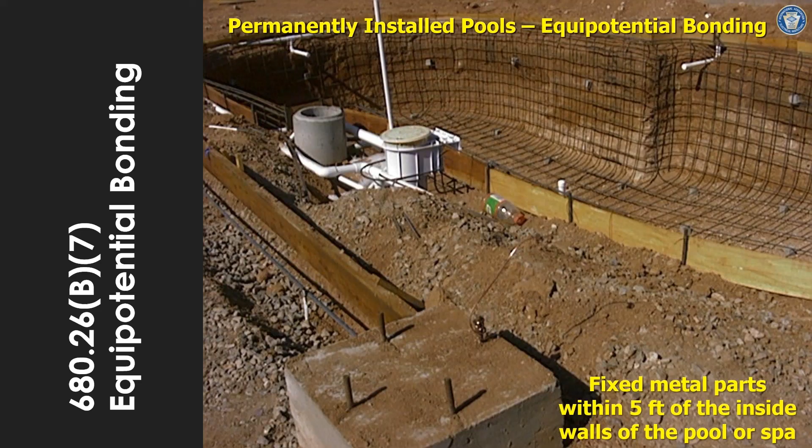Fixed metal parts might be a Haydite brick wall right here or something. And you see the installer ran a bonding jumper over here to ensure that that's going to be at the same voltage potential as that once everything gets finished. What do you think? You think the guy that installed that grill right there ensured that metal component, fixed metal component right there, is connected to the equipotential bonding grid of that pool? I hope so. I doubt that happened, but I hope it did.

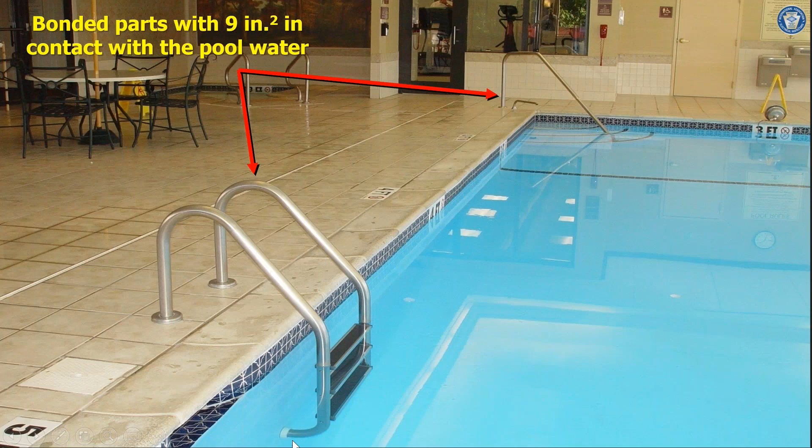Pool water. We are required to bond the pool water. Now you can achieve that with, remember those ladders and railings that we saw going into the pool? If we have at least 9 square inches of that metal that's already bonded to the equipotential bonding grid in contact with the water, then that ladder or that railing can serve as the bonding means for the pool water. So those are already bonded, and if I have at least 9 square inches of metal in contact with this water, then I've quote unquote bonded the pool water. I don't have to go to other achievements to get that accomplished. It's already bonded.

Folks, we're out of time. We got to where we wanted to get to. We're just about out of our permanently installed pools.